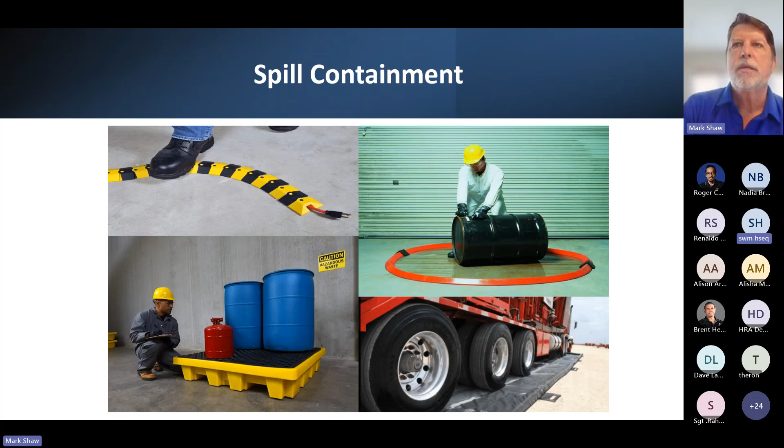Let's get started. So, the spill containment products, a variety shown there. IRP makes it easy for you to stay in compliance. That's one of the things they'll help you do, make sure you're not out of compliance and subject to fines or catastrophic spills, or even small spills that can cost money.

Very quickly, the premise here is that if you have two 55-gallon drums, that's 110 gallons total. The regulations here in the US and around a lot of the world, and I believe down there too, is that you need to contain 10% of the total number of gallons, which in this case with two drums would be 11 gallons, or 100% of the single largest container, which would be 55 gallons, whichever is greater. So when you design your containment systems at your facility, use those numbers in mind: 10% of all the containment in a given area, or 100% of the largest single container that's being held.

Spill pallets are one way to do that. We have everything from 1 drum, 2 drum, 4 drum spill pallets, with ramps that go with them. As you can see, this replaces the wood pallet, where if you have a leak, not only does it get onto the floor and potentially down a drain, but it also contaminates the wood pallet, where it soaks in, and now you have to dispose of the wood pallet as a hazardous material as well. So these are reusable, easily cleaned, and compatible with a high variety of chemicals. It keeps the containers out of the sump area, so if you have one leak, the rest of them aren't sitting in that and potentially leaking as well.

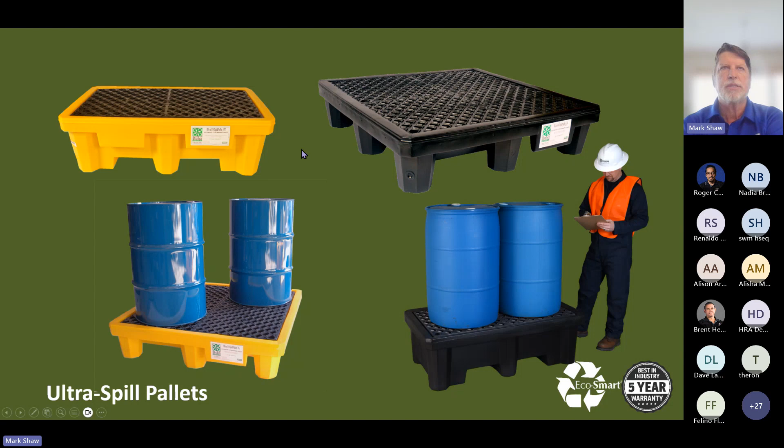We have 1, 2, 3, and 4 drum models. These are our spill pallets. They're a little lower in cost. Performance is still adequate, and they're a little higher in profile, but you can see the variety of styles here. Some are made from a percentage of recycled material, the black ones, and then the yellow ones if you prefer that to stand out in your facility.

A lot of people ask, do I need a drain or no drain? Over the years, it turns out to be about 50-50. 50% say, why put a hole in my container when I'm trying to keep the liquid in? Others say, I like the drain because then I can lift the container up if it's got liquid in it and put it over top of another empty drum with a funnel and offload the chemical from there.

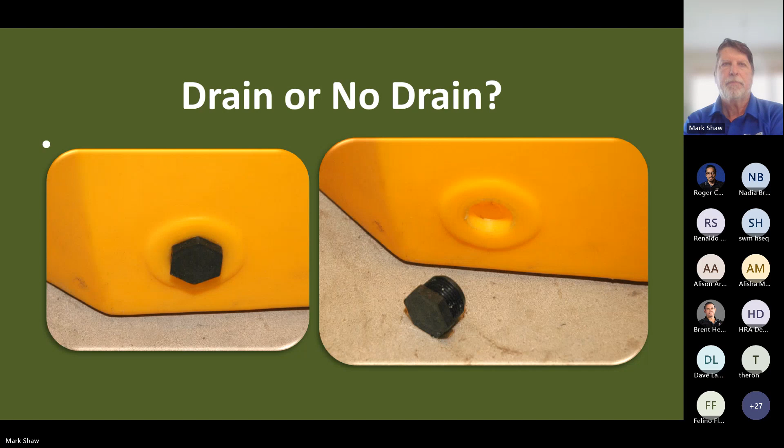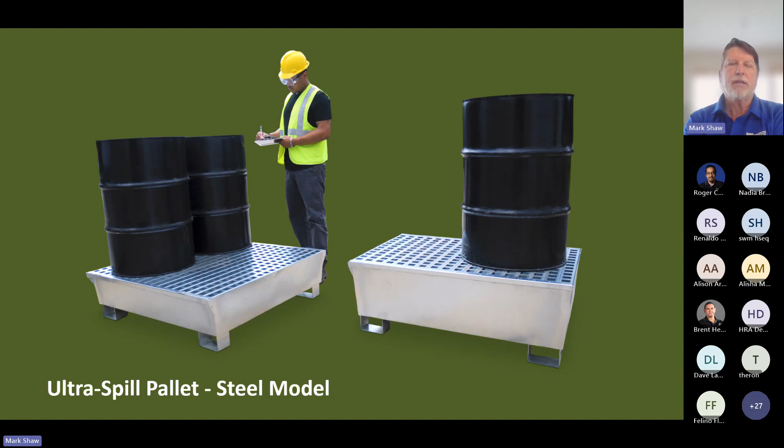And then we have steel models. There are some chemicals that would require steel over polyethylene, which is the main plastic material we use. So the steel is an option as well.

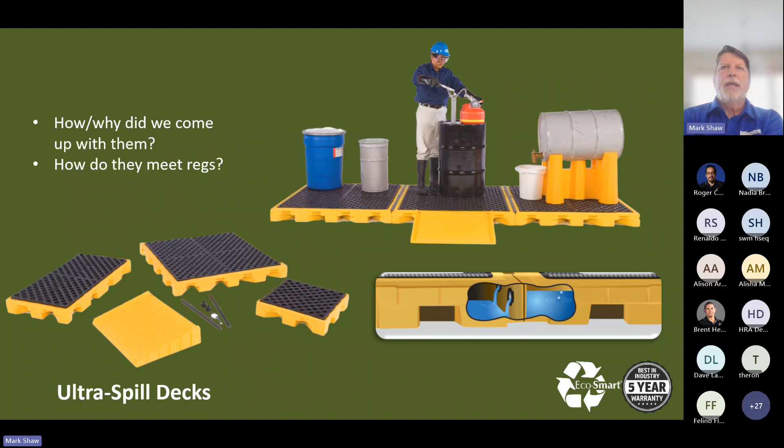And then we came out with spill decks. As you can see, they're about the same height as a wood pallet, which makes it convenient to get drums on and off without a ramp. The ramp's there if you need it.

But these are connected together. When you place them together, you can see there are these strips, or T-strips, that go in between, so that any liquids that hit between the units will go into one side or the other. Underneath, there are holes that have been drilled that allow you to borrow containment from one side to the other. So if it leaks over here, it reaches a certain point, flows through the containment, the bulkhead fittings, and you pick up the containment here and here.

So instead of having a 12 to 15 inch high spill pallet, you can have a 5.5 inch high spill deck and accomplish the same containment area.

We've had companies put 90 of these in one big room. So when you walk into the room, you're walking on these the whole time, and anything that spills anywhere is contained. You can also start off with just three here, and then if you decide you need to expand, you can add more in different shapes.

You can come along the wall. You can make a 90-degree angle on it. You can use different sizes. So there's a lot of variety in what they do.

We also then came out with a bladder system. If you wanted to contain that 55-gallon drum in a small area, how would you do that? Well, we devised the bladder system.

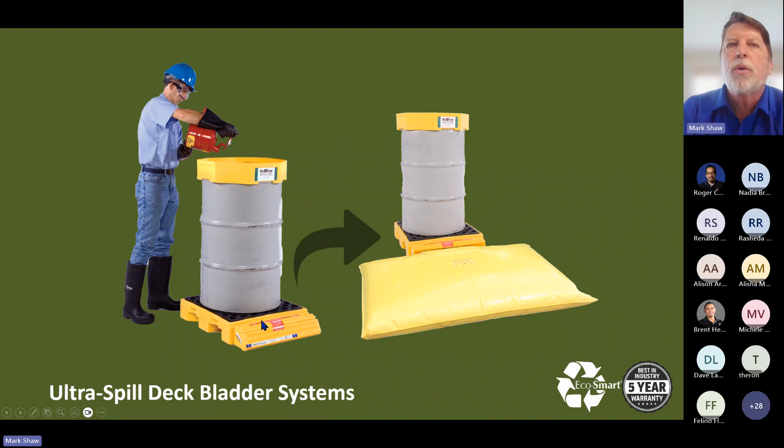So the bladder system is held inside of this box. It's connected with that flow-through bulkhead fitting, and the box is designed so that as the hydrostatic pressure going into the bag causes the bladder to automatically open. The door flips down, the bag deploys, and all of that contents can be held inside this bladder system.

If you leave on a Friday, come back on a Monday morning, and this is deployed, you know you've stopped an incident from happening over the weekend.

What you would do is remove the grate, and then we have a hand pump you can purchase to pump this out, or you could use any kind of pump. As you pump it out, more of the bag will flow back into here where your pump is, and eventually you can lift the bag up and all the remaining contents will go out.

The bladders do need to be replaced once they've been used. They're not designed for multiple use because they have to deploy 100% of the time.

So we've got a question. Yes, Mark. With regards to the bladder system, can you give a little bit more detail as to where you would connect the pump to retrieve the product from inside the bag?

Right, so if you take the grate off, now the whole sump area is exposed. The bulkhead fitting is located about halfway up the wall so there will be liquid inside the sump as well as the liquid in here. You would place the pump, if you're using one of your own pumps, you would probably pump it out from the sump area, and then more will flow back in until the bag is pretty much empty. And then you can lift the bag up and the rest will flow in there.

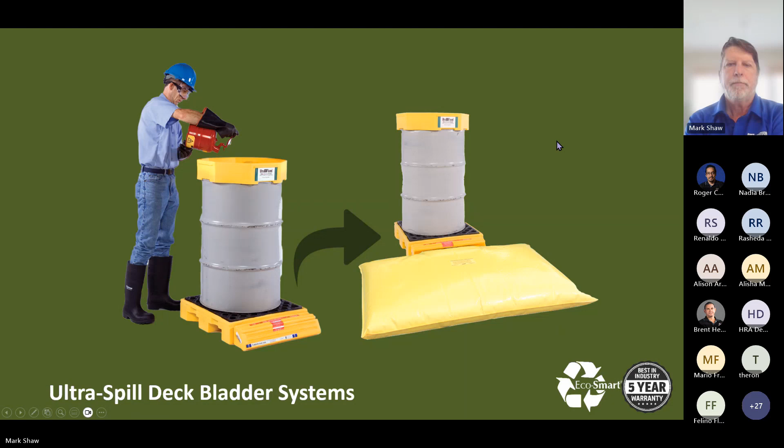So you can make 3 drum, 4 drum, 5 drum, 6 drum, whatever size you need. This one has a bladder to meet the containment regulations, but if you added another unit to this, you would not need the bladder because you'd have enough containment since they flow through.

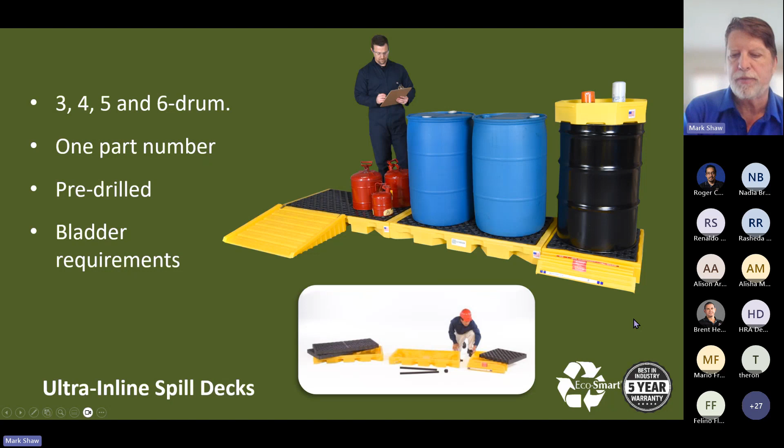We also have fluorinated models. Many of you may be dealing with chemicals that are stress crackers, or just really tough, high percentage acids, things like that. If you've got concerns about chemical compatibility, we have a list that you can check.

But some people have to get a fluorinated spill deck. We make them light blue so you know that that's what they are, and those can handle virtually most chemicals.

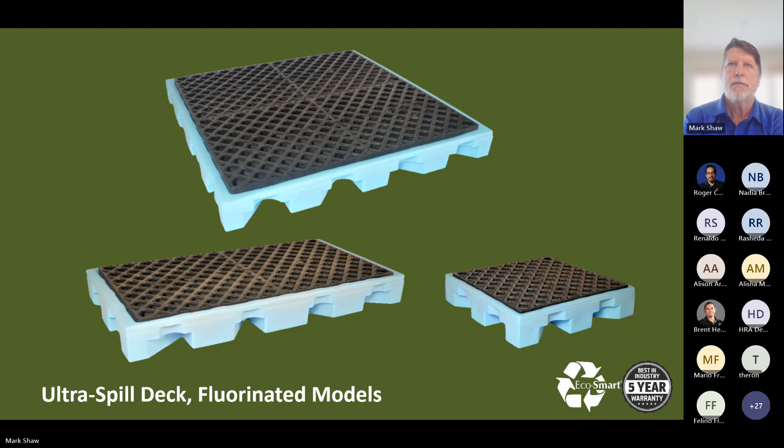Our hard tops are a very popular item for outdoor containment. This is an original model we had. We call it the gull wing cover, and it allows you access to the containers and so forth. You can see there's not a lot of height inside. You can get one of our funnels in there if you want to use it for satellite waste collection.

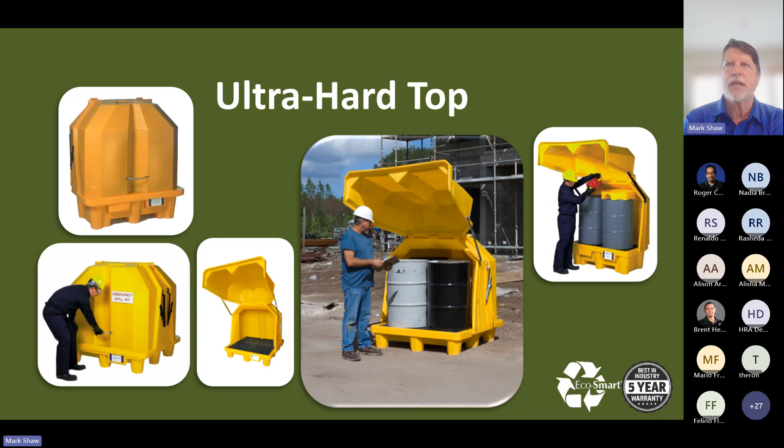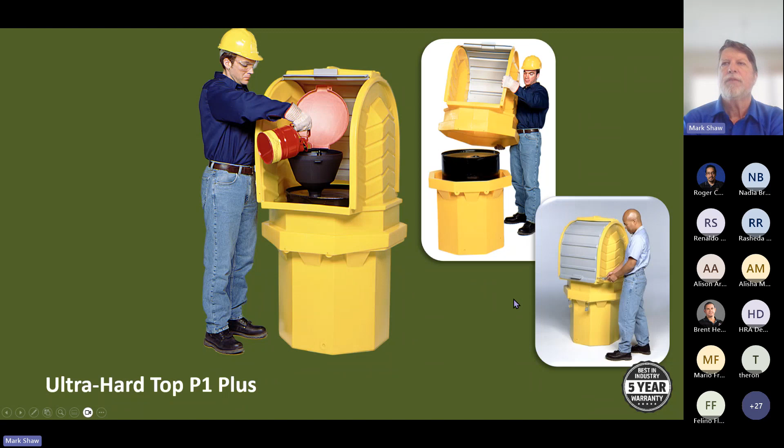This is a less expensive model on the market for us, and then we have our second generation, which is our hardtop plus. This is a 1 drum model. You can see how you would access it by lowering it in with a forklift, put the top on, and now this door rolls up and you have access. You can lock it if you have a security issue, and that's a 1 drum model.

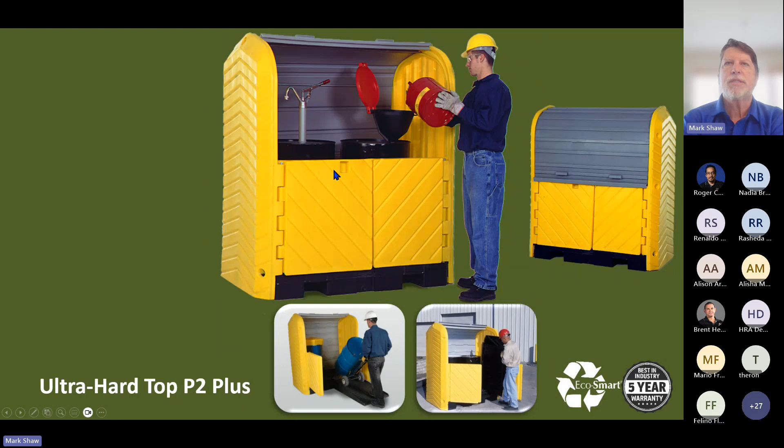We do have a 2 drum model, which you can see that's got the barn doors, which open up, allowing you to access and put the drums in and out.

This is a typical satellite waste collection operation. You can see the height here allows you to have funnels and drum pumps. You could be pouring waste into this drum and pumping virgin material into a 5-gallon bucket to use in your facility. The 2 drum model with a ramp can also be lockable in this area here.

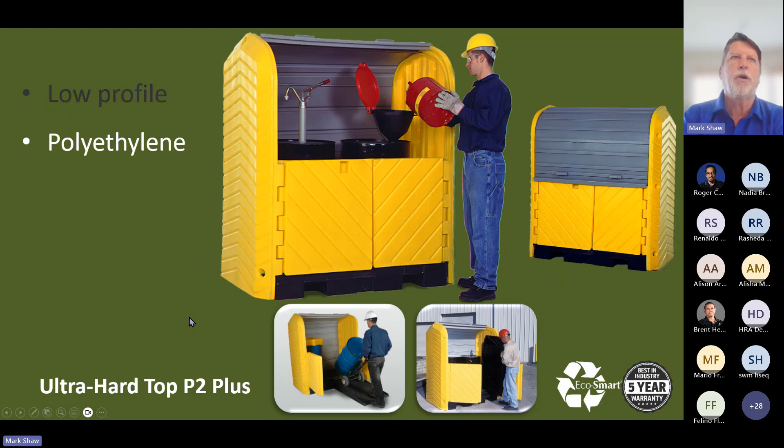So, low profile polyethylene, it's got the dual closure and an optional ramp, and it's forkliftable. The 4 drum is same as the 2 drum, except now you have access from both sides. This looks identical on the other side, so you can actually access all the drums as you need to.

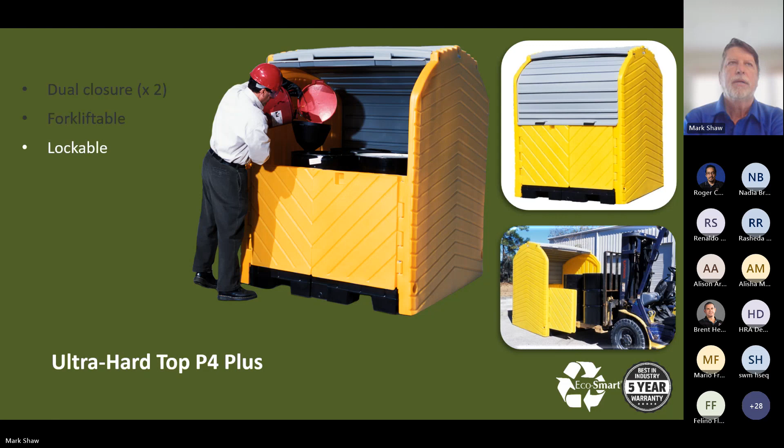You can also do what we call little condos, where you add them together using an extender wall, which allows you to use the two outer walls that connect everything together. You could have oil drums in one, ammonia drums in another, acid drums in another. Each one has its own separate sump, so you don't have to worry about cross-contamination, an explosive situation, or fire—something you don't want to cross-contaminate between chemicals.

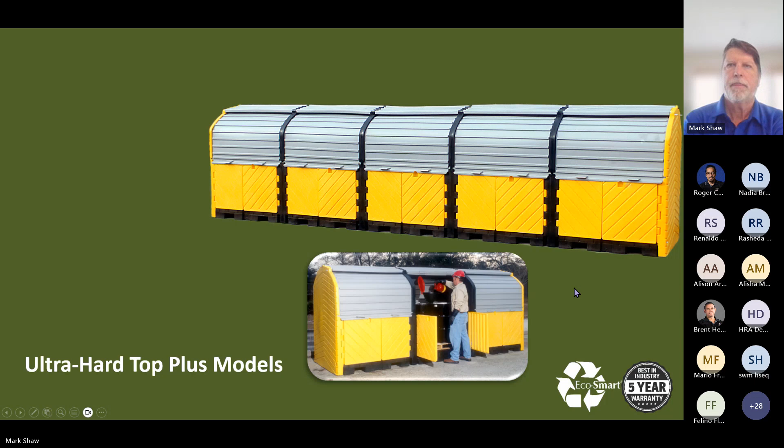A lot of you may have been switching over the years from drums to IBCs. Intermediate bulk containers are pretty popular—you'll get anywhere from 4 to 6 55-gallon drums inside one of these. So instead of moving 4 to 6 drums, you're moving one IBC tote at a time.

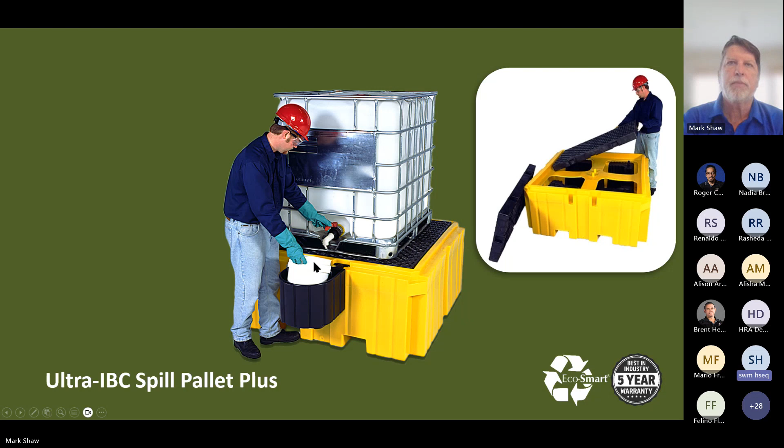You can see the internals—we have support structures in here, and the grating goes on top. This contains up to 400 gallons and provides containment for the whole contents. This is an optional shelf which can drop in, and since these valves will often leak, this gives you containment for a dripping valve as well, and a place to empty it into a 5-gallon bucket to contain any spillage.

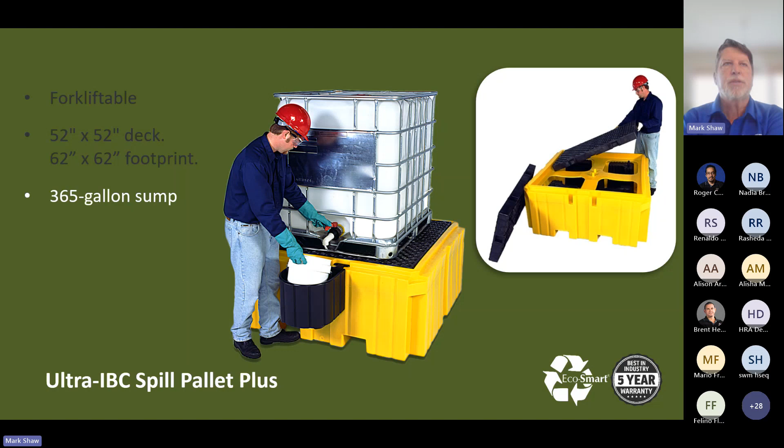It's forkliftable—not with a product or container on it, but just to move it around. You've got the footprint, and it's a 365-gallon sump—I said 400 earlier, I apologize, that's a different version of this. It's 365, with 4 inner columns, and the bucket shelf is available.

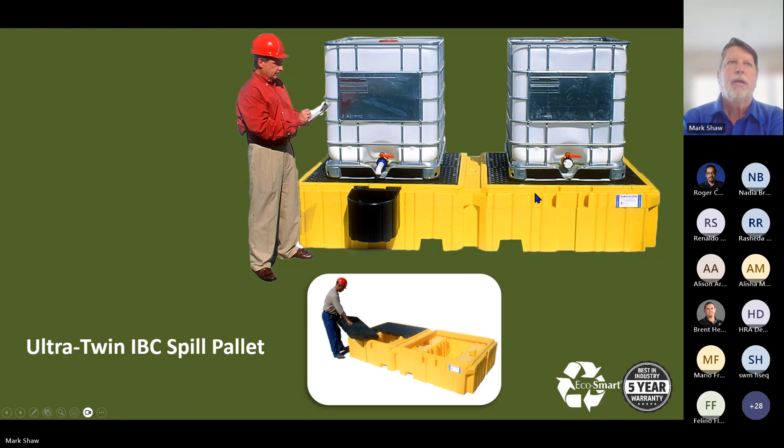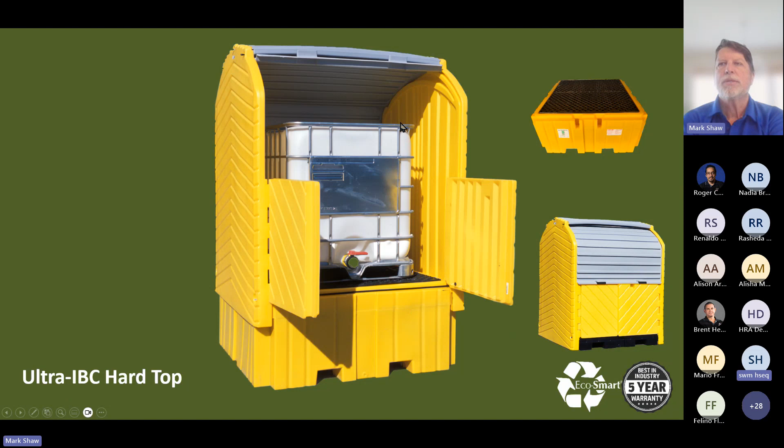And it has a larger sump, as you saw there. The IBC hardtop—just like we have hardtops for the drums, the same hardtop can work with the IBCs. So you can have that containment as well, with doors and lower containment here. It's a practical way to store these products outside—365-gallon sump, forkliftable, lockable, and made out of polyethylene, same as the drums.

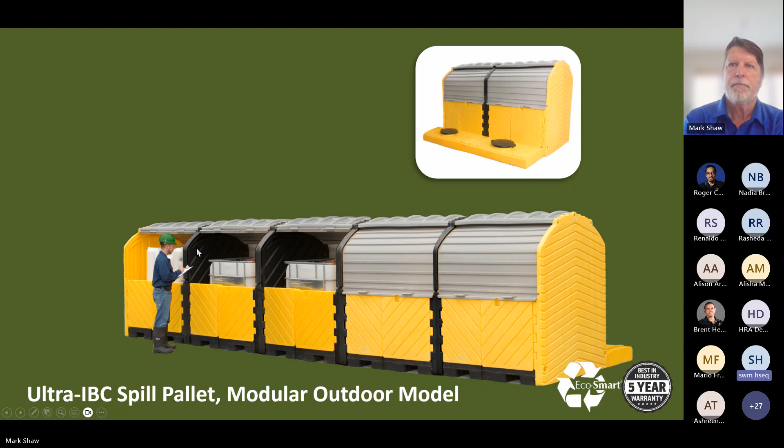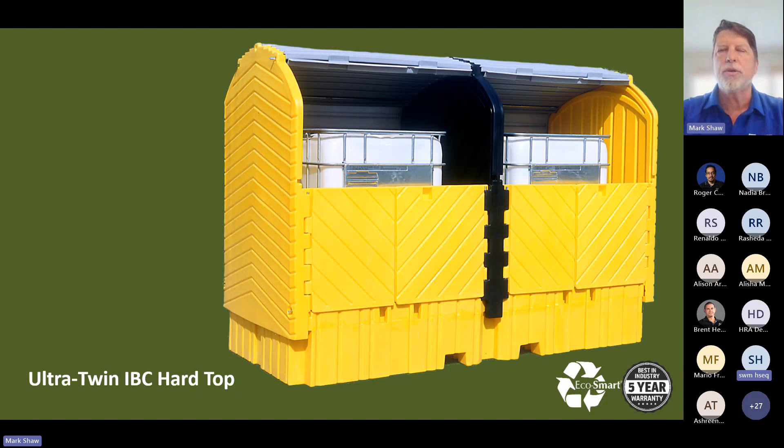And then we have the hardtop version for the twin IBC. You buy the extender wall for the middle, and as you can see, everything kind of goes together—it's a well thought out product line where things can be added and put together to meet your growing needs or your current needs. It's got the same sump as a twin IBC, forkliftable, lockable, and made out of polyethylene.

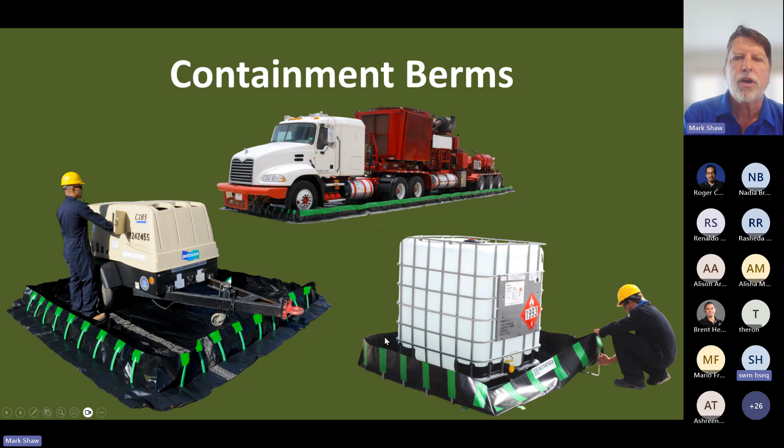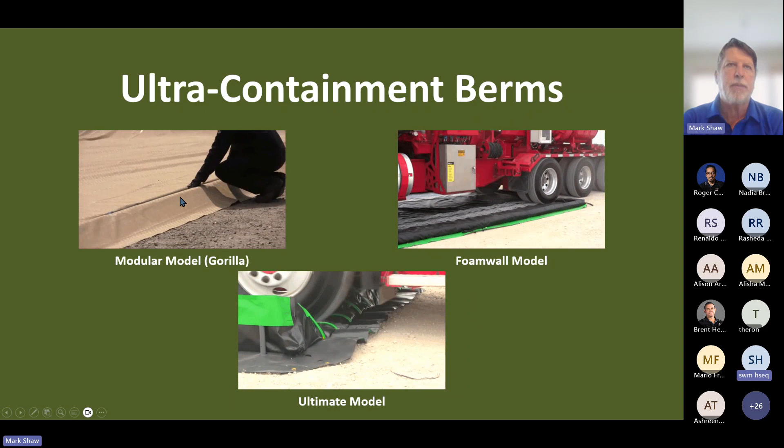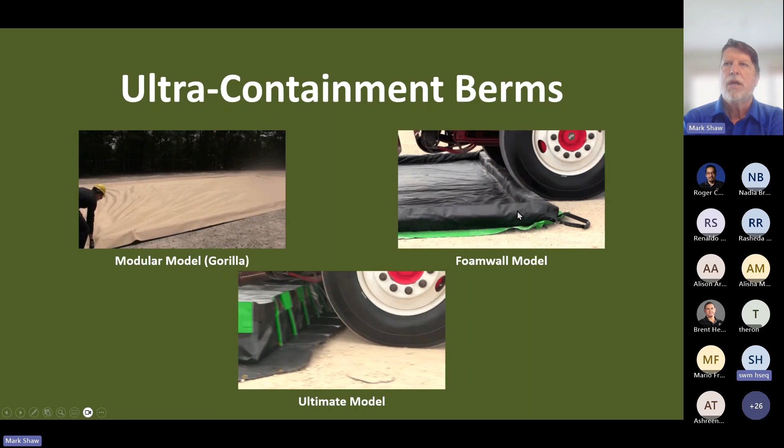We have a large variety of styles. This is a modular gorilla berm, we call it—you put it around the perimeter and snap in a rebar to hold it in place, so you can drive right over it. Very durable, hence the name gorilla berm. There's also Foamwall models—the foam actually collapses under the weight of the tires and springs back up. It's another very popular model of ours.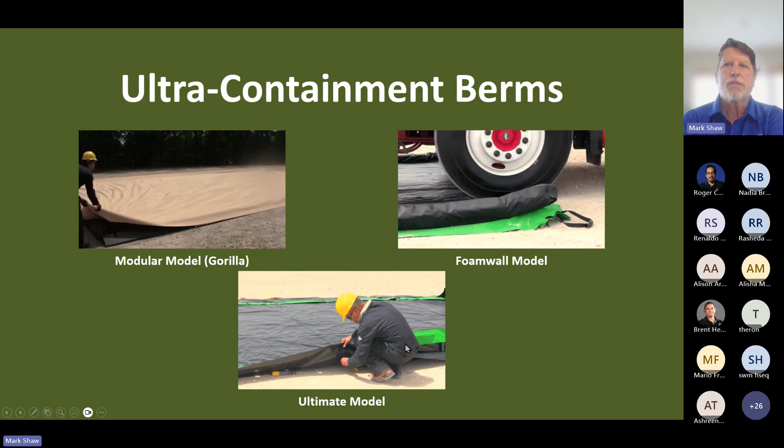The ultimate model uses a less expensive sidewall but has vertical urethane rods that fold in and out under the weight of the truck, so you don't have to get out of your truck to drop the wall down.

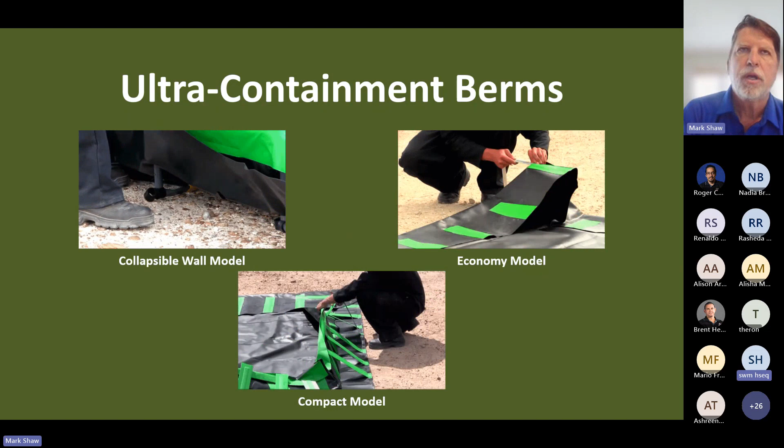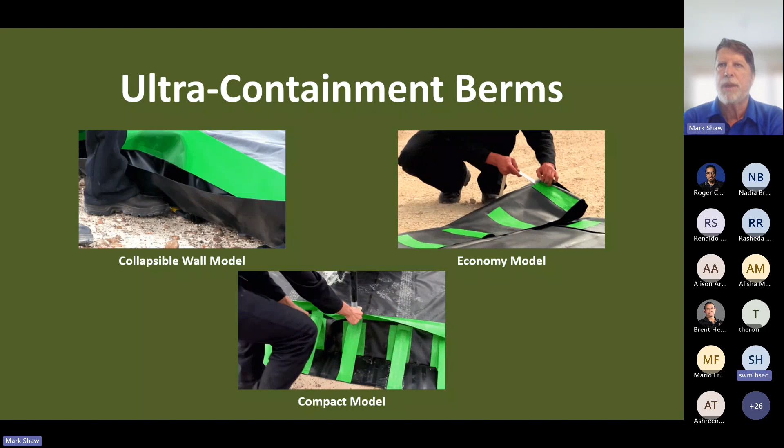Collapsible wall, economy wall. This is a lot less expensive. That's for something that's going to be set up and doesn't probably need to be driven into all the time, so you don't have to undo it every time, but it's a lot less expensive.

And the compact model has its own way of being set up, and it can fold up into a very small area. So a lot of different options, because there's a lot of different needs for different industries for their specific concerns. So the foam wall, as I mentioned, is a very popular model. These are available in stock sizes, but we also do basically any size that you need. We've done ones that they've driven 747 jets into, so they're fully contained.

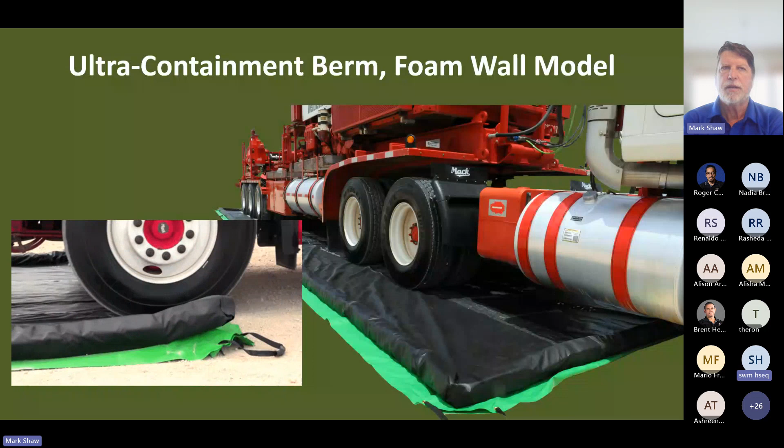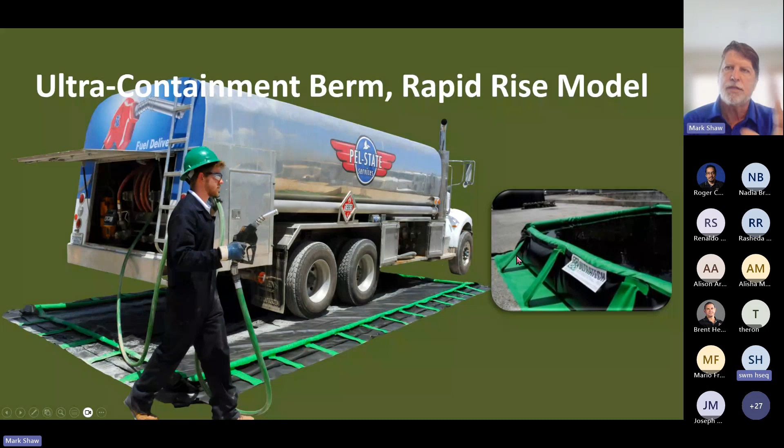The rapid rise model is interesting. This top part of the unit is actually foam, so that when it's laying down, you can just drive in, drive out, step into it, no problem. If there is a leak and it's big enough, the leak will actually cause that sidewall to rise. You can see this is filled with, in this case, just water, but it actually floats the sidewalls up automatically. And then they fall into place and provide the additional strength you need to keep the water from knocking the walls down.

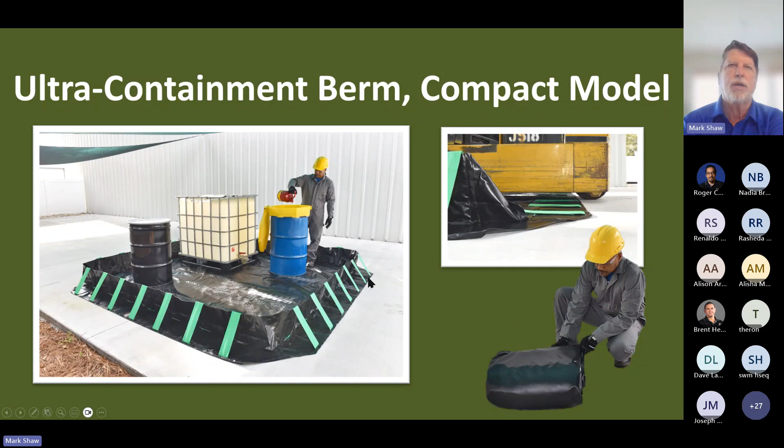The compact model I mentioned, that becomes that. So it makes it easy to store it, set it up, and use it in a lot of different ways.

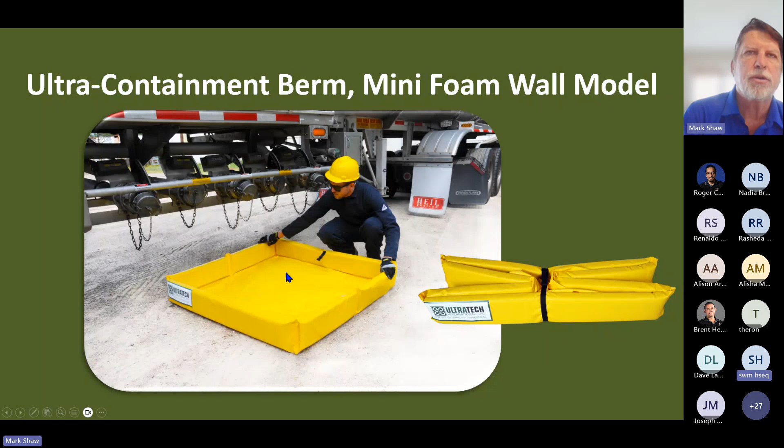We have the mini foam wall berm. It comes packaged up like this. You open it up, it has foam in the sides, and you can use it for smaller applications where you need something to go underneath. Like in this case, this would be where you'd be hooking up a hose and there could be drips and leaks, or when you take that cap off, some residual materials will fall into the berm or the foam wall.

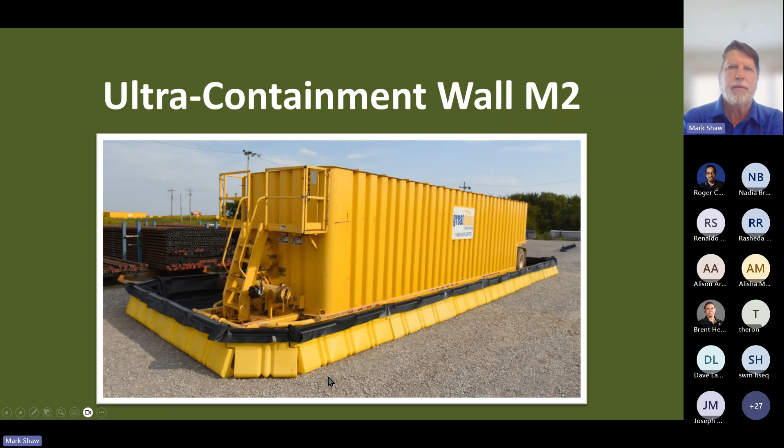This is a nice product, the containment wall. This is all plastic, L-shaped walls that you put a liner into, and then you snap a cap over the top, and it holds that liner in place, so that you can put large tanks in there, virtually anything you really want, storage tanks and so forth. This particular one drives in, drives out, so you remove the wall and drive it in or out. You can start to see the look of the L shape there. And we have this 1 foot, 2 foot, and 3 foot versions.

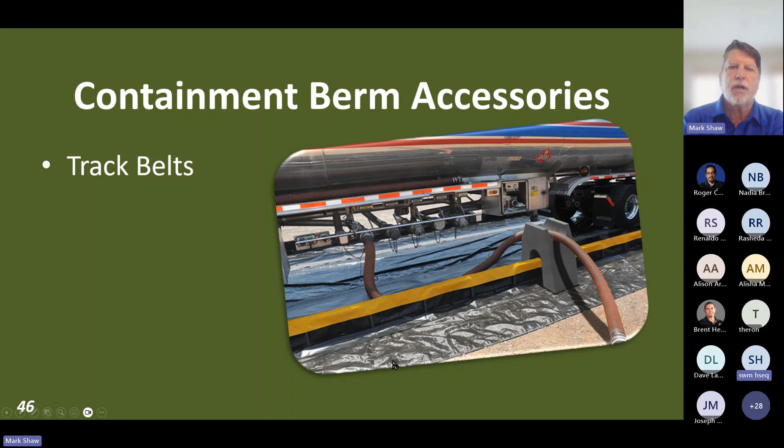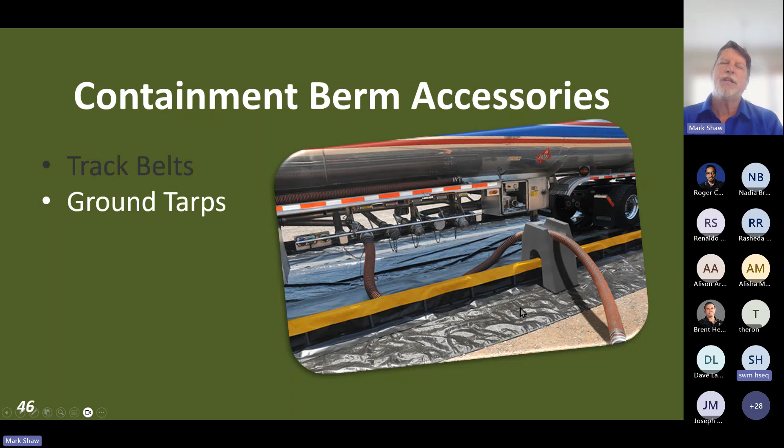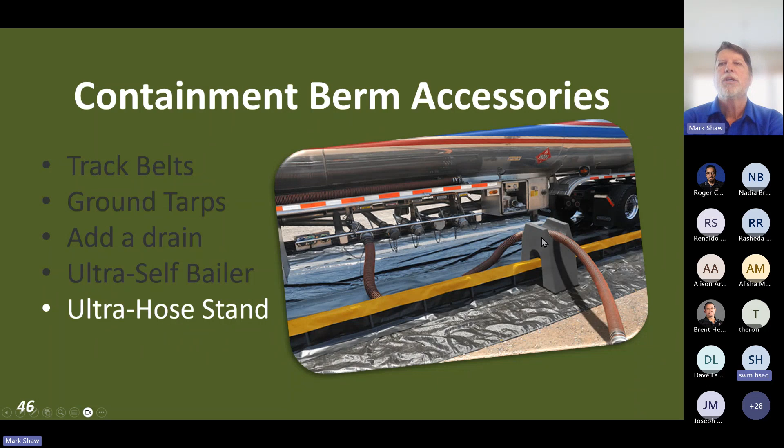We also have accessories like track belts, so that you can put those down on top of the berm where your truck tires will go over. That helps protect the berm from getting any holes or leaks, and lets it last longer. We have ground tarps that can go underneath the berm, like you see right here. That protects that berm, which is your primary containment. You can add a drain to it. We can add a self-bailer, which we're going to talk about in a second. And then the hose stand—if you take that and it's filled with liquid, it could start to push down on the sidewall and reduce your containment. So you can get a hose stand that bridges that sidewall.

Any questions on the berms?

Next up, some more spill containment: utility trays. You wouldn't believe how many of these we sell every month. You can go to the local hardware store and buy a very inexpensive injection molded tray, very thin, and it'll last you a couple of weeks to a month. People that get tired of doing that just buy these. They have ribs in the bottom so that if there are any drips or spills, none of your containers are sitting in that. But it will give you some containment for these smaller amounts, in different sizes and shapes. People put them on shelves, they put them on floors, they put them in the back of pickup trucks. Just a large variety of ways to be used.

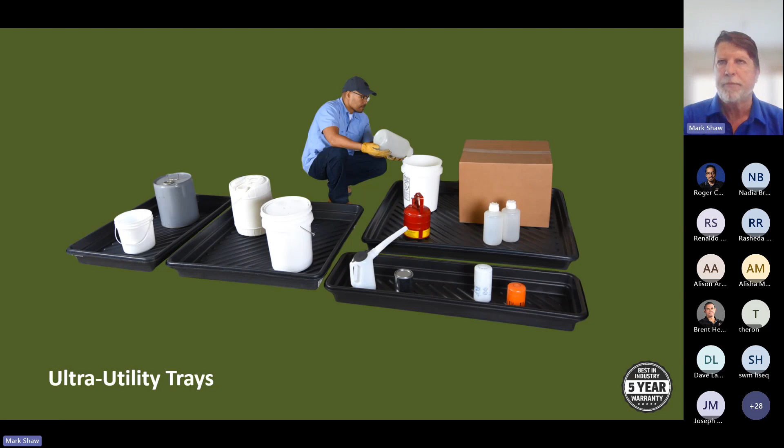For those of you that deal with oil and gas, you are probably aware that a lot of times the connections between pipes will drip and leak. This allows you to capture that at those junction points. They nest together for storage and shipping, so it's a nice product for that application. Completely reusable, can withstand the weather.

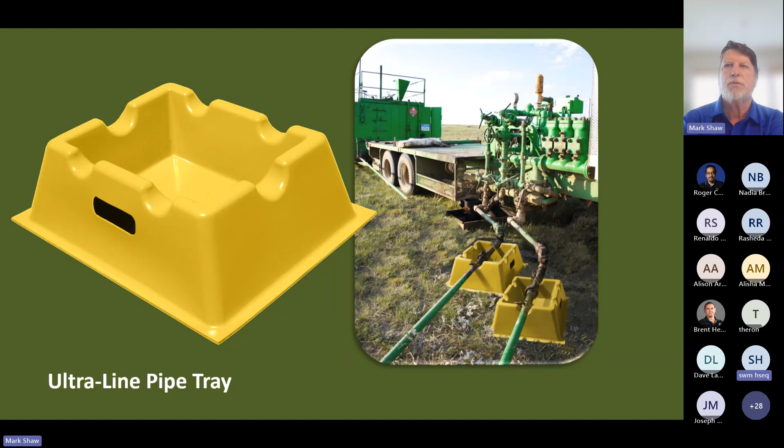Rack sumps. If you're looking at getting your house in order, this is a nice product. You can see all of that would typically be sitting on either wood pallets, could drip and spill, like you see down on the floor here. Now you can have that containment all the way up your racking systems.

It's got an on-off valve here, so you can attach a garden hose to it. And if you did have a leak in one of these, you'd be able to connect the garden hose and drain it out. Once it's basically drained out, you could take the contents off of it, bring that down, and then clean it up with some absorbents, make sure it's dry and ready to go again.

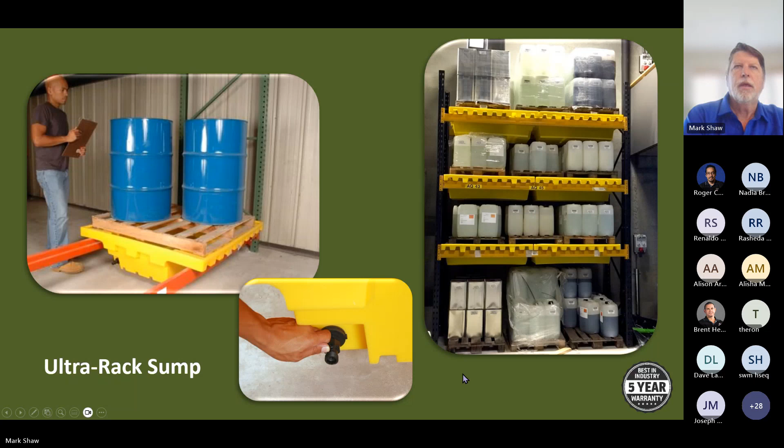I mentioned the self-bailer. This is a device that's very useful in an island that has a lot of oil wherever you go. You can hook this up into any of our containment units, into our containment berms, but also if you've got an outdoor concrete sump that's always filling up with water, and there's some oily stuff in there, you now have a bunch of oily water that you have to dispose of.

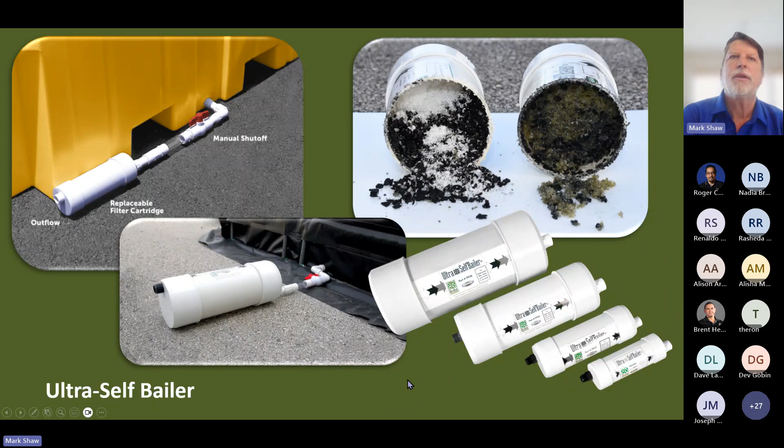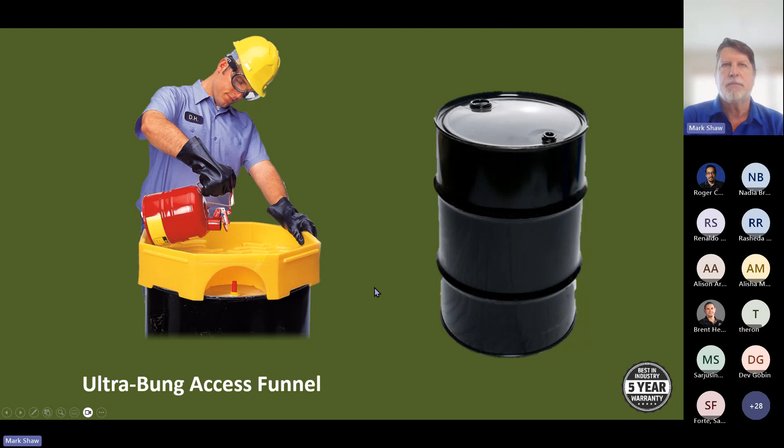You've seen this in a few of the photos. It's a bung access funnel instead of a typical funnel style shape where you pour liquid in and it flows out the other side. It doesn't allow you to put filters on it to drain them and so forth. This is a design we came up with that's very popular and can give you more versatility in a funnel design.

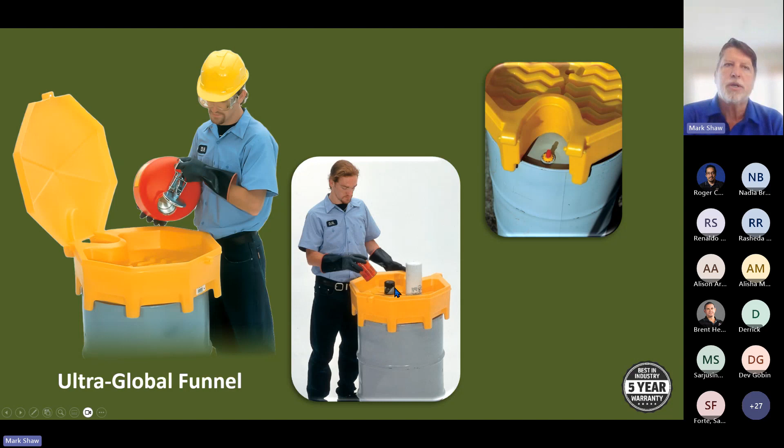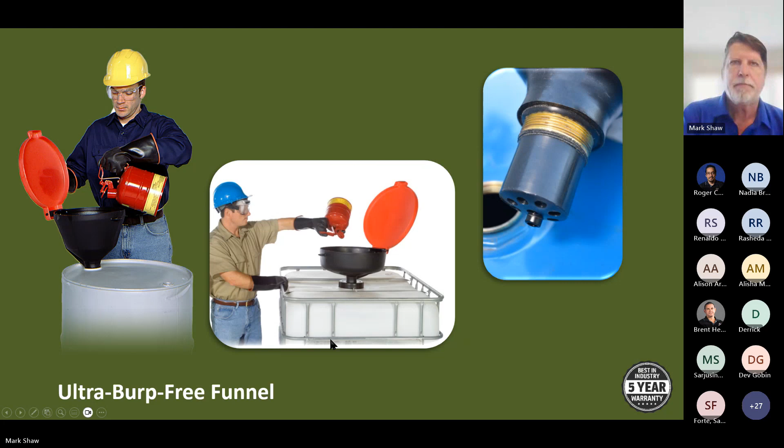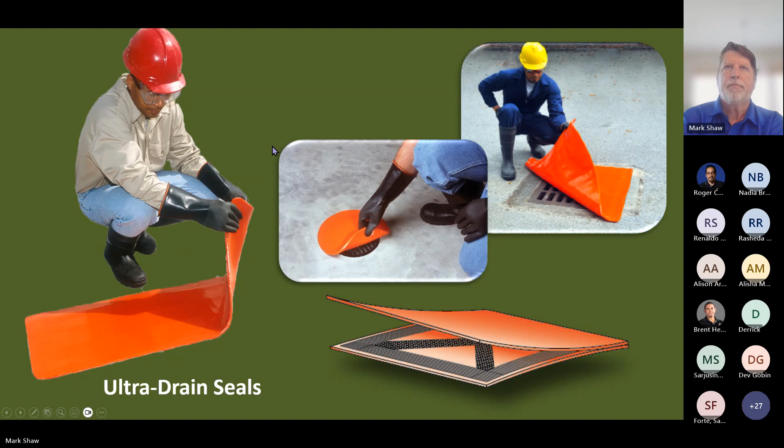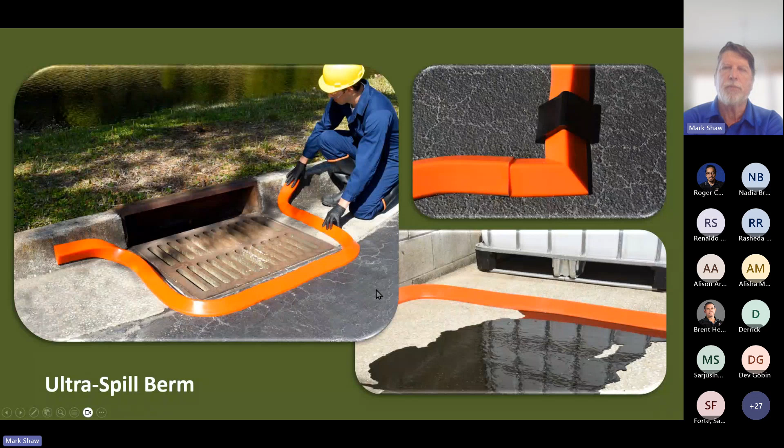We use the same material and we make a spill berm, which allows you to create dams and temporary dams for either outdoors or indoors. Again, another spill response product that's very valuable because if it stops the spill, it's saving you a lot of money.

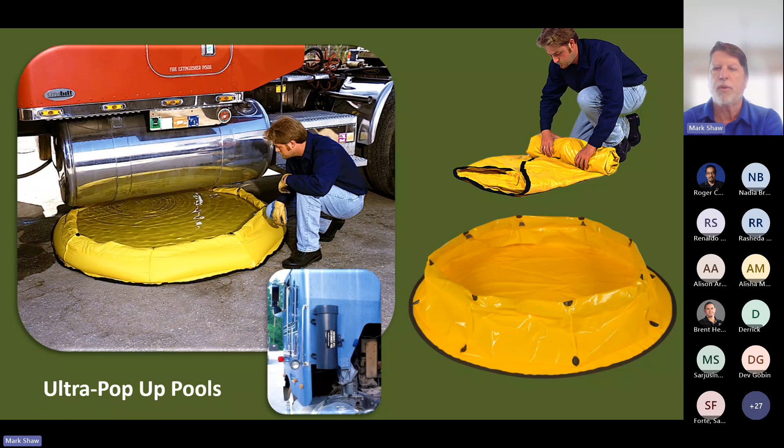We've got a variety of sizes of these too, everything from 20 gallons up to 400 gallons.

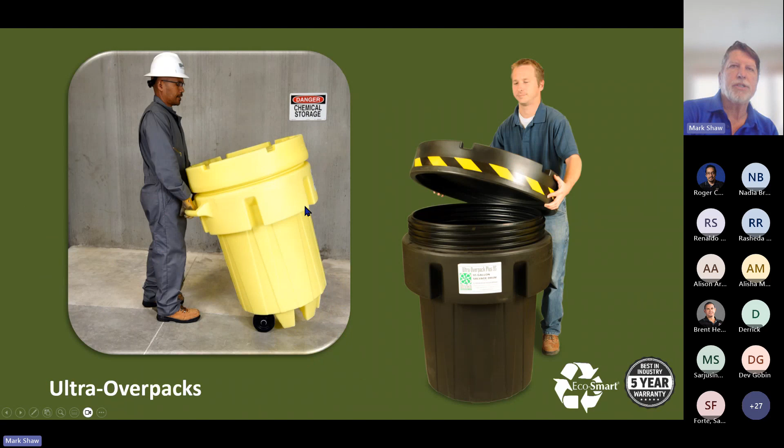We have some with wheels on them, but they make great spill kits. You fill it with all your absorbents so you can take it to a spill. Then when the spill's over, you can put it all right back inside here with the soiled absorbents, screw the lid on, and ship it off. This is a recycled model.

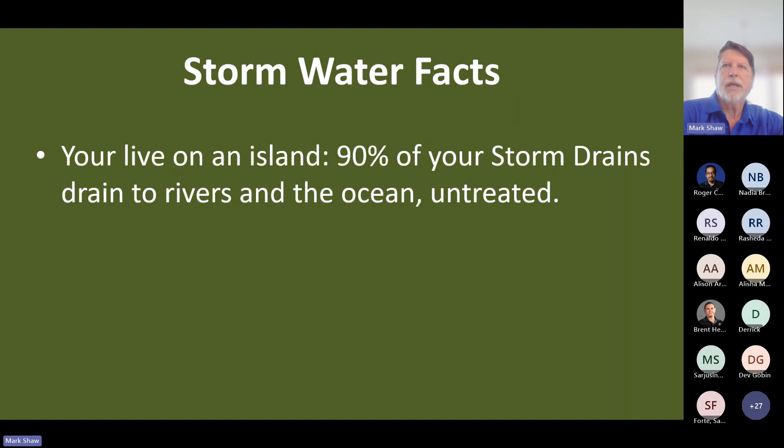Stormwater management. Here's some facts. You live on an island. 90% of your storm drains drain to rivers and to the ocean untreated. And that's everything from cigarette butts and microplastics to oil and heavy metals, pesticides, and fertilizers.

One quart of oil will create a one acre slick on water. It doesn't take much to really start screwing things up. Storm drains are really a big source of pollution not only for larger countries, but also living on an island. That ocean's got to be precious to maintain.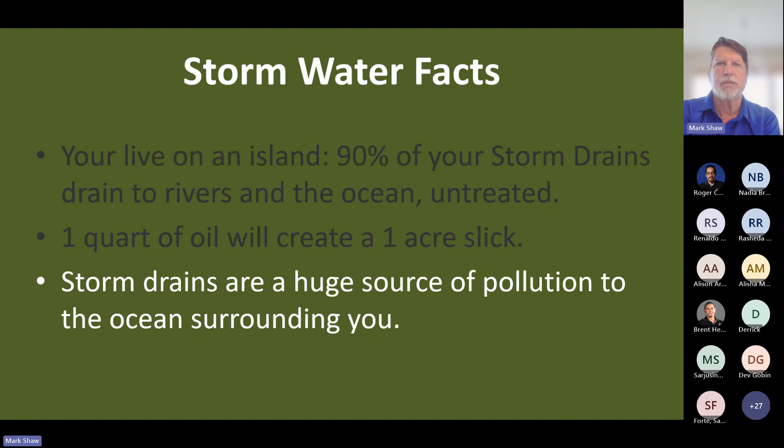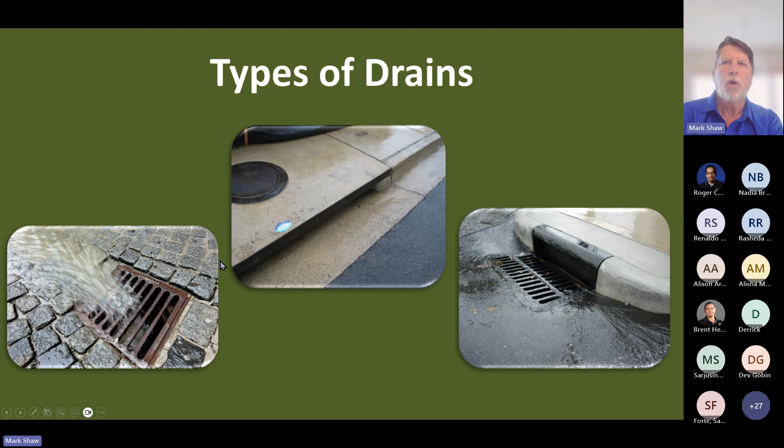Three different types of drains. Basically, you have your flush mounted drain, horizontal in a road or street or parking lot. You've got a curb opening, which only has a drain along the curb of the street. And then you have a combination where water comes in here and also can escape underneath there, so it's a curb and drain combo. We have products that do all three of those.

Our most popular stormwater product is a drain guard. This is made out of polypropylene material. You set this down on top of the drain, put the grating on top of it, and then anything that flows in there - all this sediment, if there was oil there, trash, debris - would be captured on a high percentage basis by this filter. After it gets full, you take it out, replace it, and put a new one in.

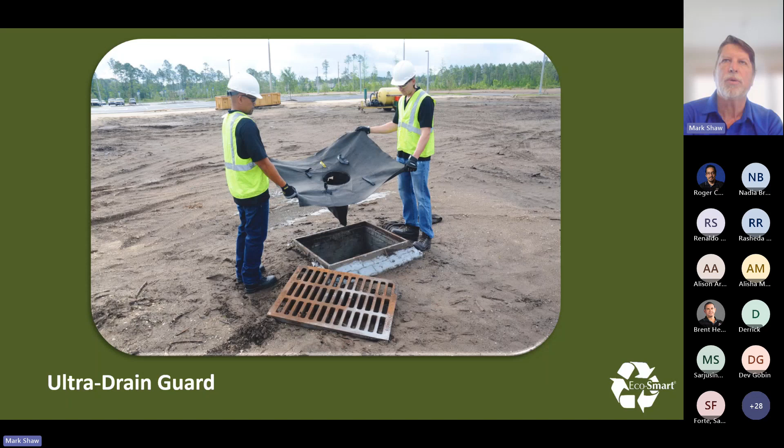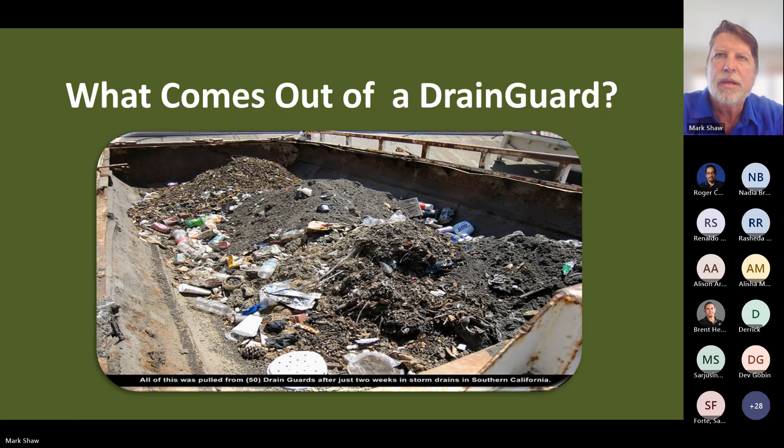What comes out of a drain guard? This was a study done in Los Angeles some time ago where they put 50 drain guards in, and then removed them after 2 weeks and dumped the contents into this roll-off dumpster. I think this is a fascinating photo - that's the kind of stuff that came out of 50 drains in 2 weeks. Can you envision if you had 50 drains in your country that every 2 weeks was dumping this much into the waterway, into the ocean, how big a problem that is, and how easy it is to clean up by just using a drain guard.

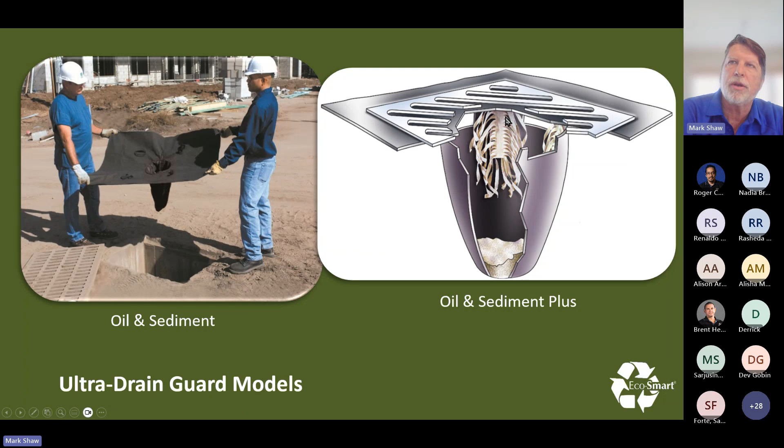We have an oil and sediment model, which you use typically on construction sites. We also have an oil and sediment plus model. These are strips of a particular type of oil filtering material that'll grab the oil and let the water drain out.

We also have a heavy metal model. If heavy metals are a concern getting into the waterway, then you can use this model. We have a trash and debris model - you might put this around stadiums or wherever, like a parade route or something like that. It'll capture the trash and debris in this mesh bag. We have adjustable frame models, so you can open them up and set them in when you put the grate in.

So these drain guards basically are just a great first line of defense against any stormwater issues you may have.

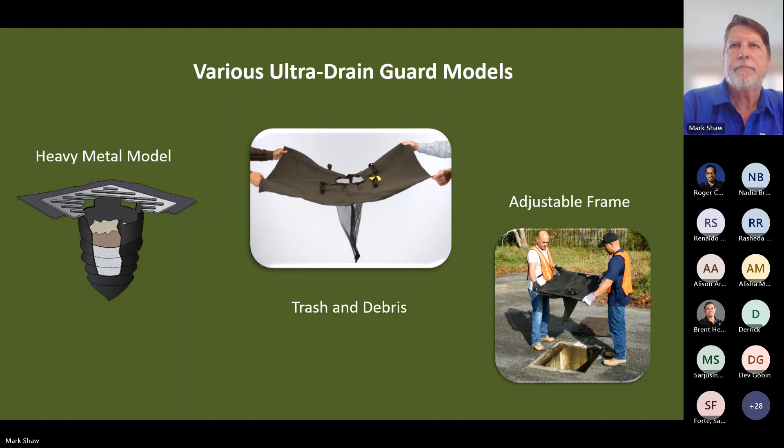If someone says, I need a true filter, I need a filter that will remove the sediment and then treat whatever is in the water after the sediment's been removed - well, this Hydrokleen will do that. The water will come in here, the sediment will drop out, it'll flow up and over, and then we have 3 different bags that are filter bags in here that can remove oil, hydrocarbons, phosphorus, heavy metals, and other types of chemicals with a carbon media put in there. So you have different options of what you can use in combination to create a clean outflow of product. And these you would have to design specifically for whatever size drains you want.

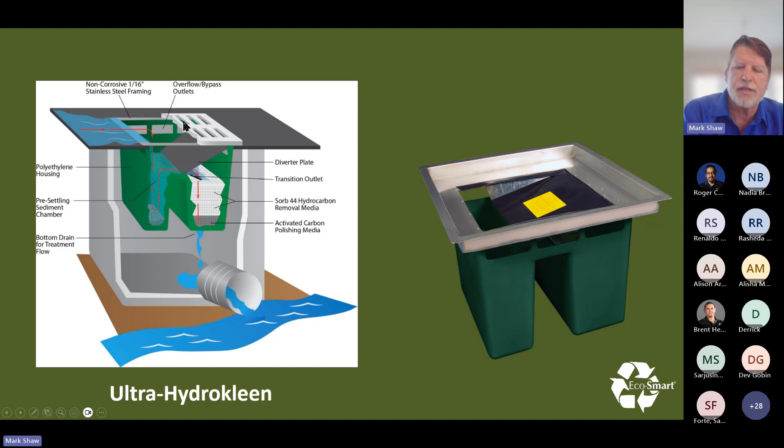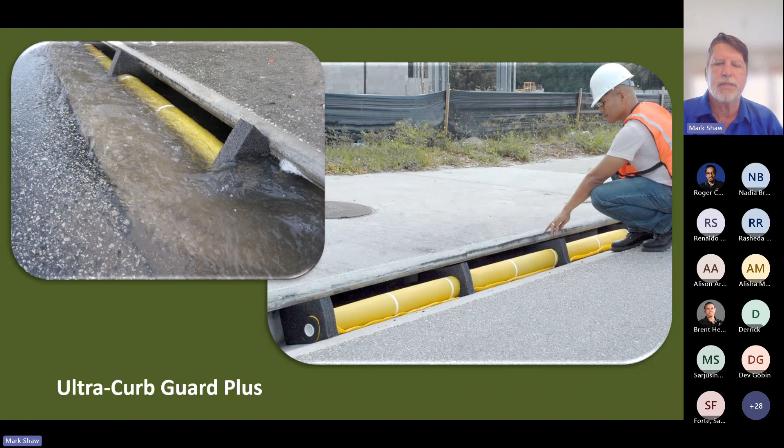But this is a nice product to consider. It was rated #1 by the Florida DOT, Department of Transportation, when they did a test to try and find out what the best performing stormwater devices were. And this for the curb opening was #1.

Dewatering bags. Used to be in the US, you could just take that pump and pump it right down the street into a drain, and you'd see all this muddy water going into a drain. Then if you looked at where that drain emptied into a river or the ocean or a lake, you'd see a big plume of brown water.

Can't do that anymore. So now when you pump them into dewatering bags, clean water comes out, the sediment stays in here. These are a one-use type thing. You can pull it to a different part of the site, slit it open, empty out the contents, throw the bag away, or put the whole thing in a dumpster.

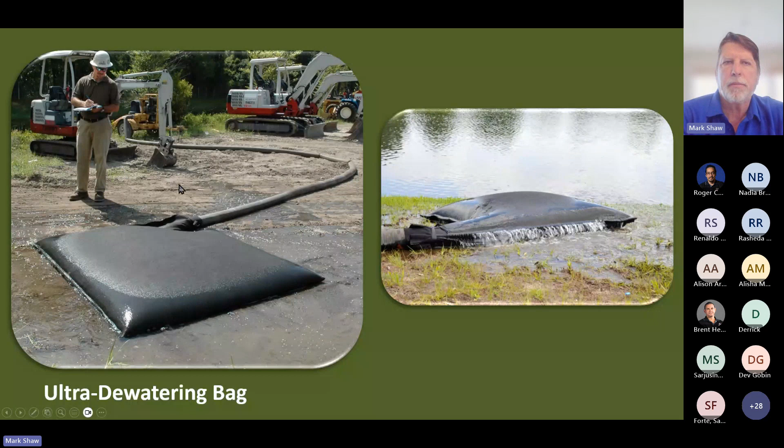Some people put these on top of a wood pallet, so when it's full, they can just take a forklift, lift it up, and dump it. Different sizes are available for different needs.

This has become a very popular product, a filter sock. We put the various media that you saw in the HydroClean inside of here. So this could remove heavy metals, sediment—it's got ground up recycled tire for sediment—oil removal product, phosphorus removal product, and also a chemical removing product as well.

So based on your needs, you can use this around drains. You can actually put more than one. You can have maybe one on the outside that removes oil, and then one on the inside removes heavy metals. So the oil won't get past the first bag and therefore won't contaminate and screw up the heavy metals from doing this job.

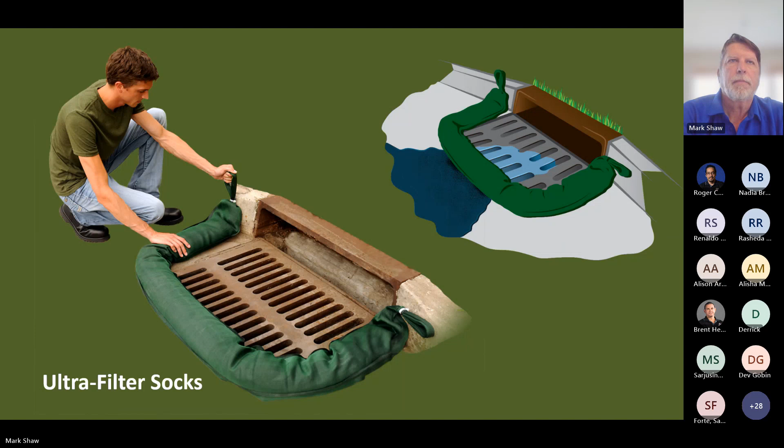If any of you deal with concrete or washout from concrete, this is an issue. Again, it used to be that you could put it down the drain and it would harden in the bottom of your drain, or it ends up on your site, and it's a very high alkaline base. It's about a 12 pH, and that's a real hazard.

That's a big hazard. So with these, it comes folded up. It's got a bag inside of here. You put it in there, and you might get, depending on the size—this one is 140 gallons, 530 liters. You can have different sizes.

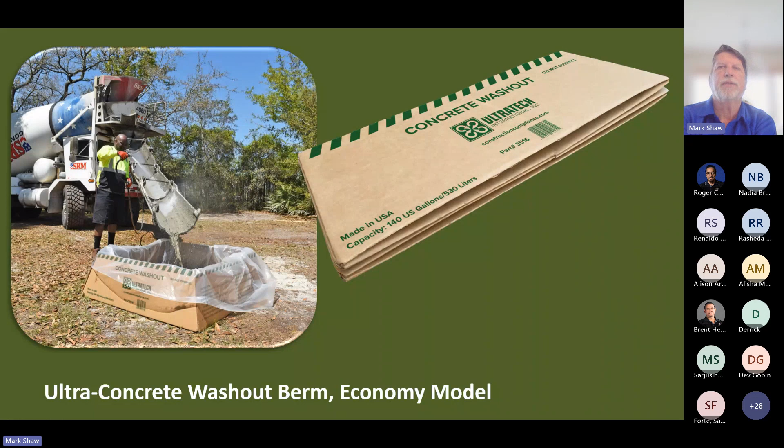And at the end of the week, again, put this on a wood pallet. You can pick it up and dispose of it off site. You can just take a sledge and break it up and get rid of the concrete that way. Different options for you, but it's a very inexpensive, easy to use product for people in this market.

The Ultra Flood Stopper—when you get the heavy rains and you get flooding, the Ultra Flood Stopper can be a lifesaver. If you can envision a street that's got a bunch of shops on it, and when it floods, water goes in the front door, maybe in the back roll-up door, and they're shut down for a week or two while the flood recedes, and then they have a big cleanup effort. You could be the shop that puts these in front of the doorway, and you're going to stop the flood from coming in.

You don't have to have a shovel and find sand and take the time and trouble to go through all that. This was an older version. The new version we call the Flood Stopper. It's black, and it also has a tube version, either a 5-foot long, 8-inch diameter tube, or a 10-foot long tube. Those can go across and be stacked on top of each other to create a seal on the back door of buildings where you have large roll-up doors and things like that.

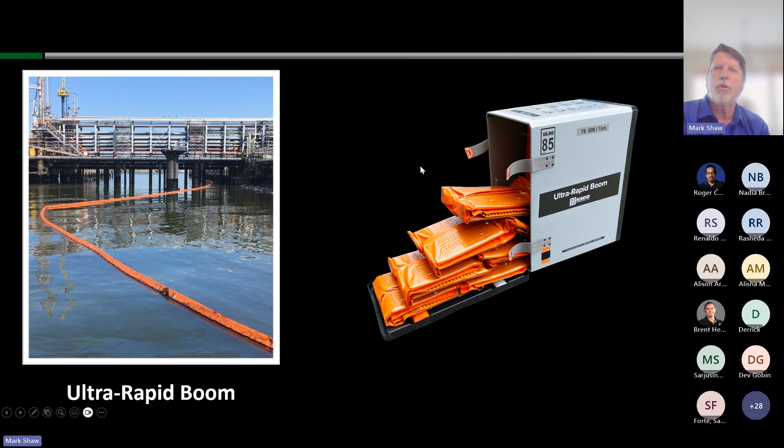Facility protection products. We have cord protection. It's different than what you've probably seen out there, which can be somewhat big and cumbersome. These are designed for an office or for cabling out in a factory or in a commercial setting.

So you don't need to have a 6-foot long, large urethane unit when you really only needed 3 feet. You just use the amount that you need. So that's a very popular product for us.

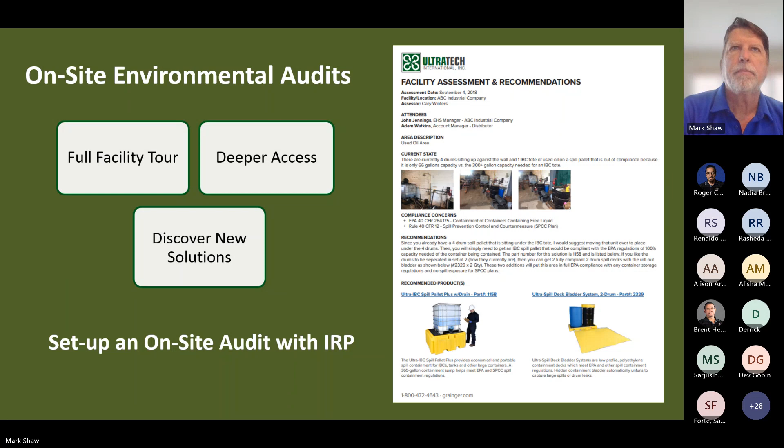So that's the presentation. I think we made it within the hour. Any questions that you might have?